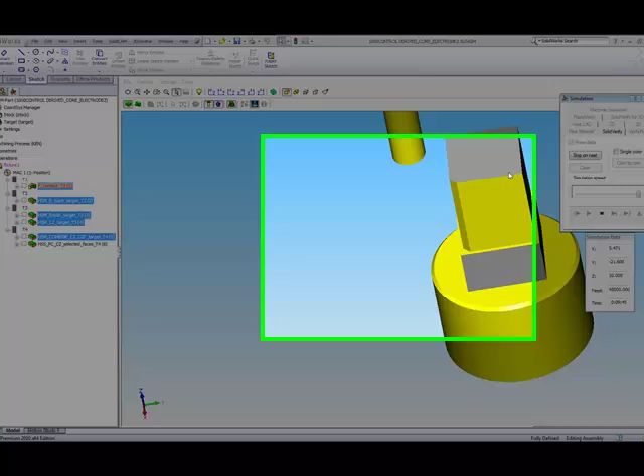We've improved our high-speed surface machining to be able to do those sharp corners by giving it an extra option of putting in a negative offset. Let's first take a look at our simulation up until the high-speed surface machining operation. You'll see that we first started with a regular profile operation and then continued with an HSM roughing operation to take out most of the material, as we can see in the simulation itself. Then we've done a rest roughing to get out the middle material as shown over here.

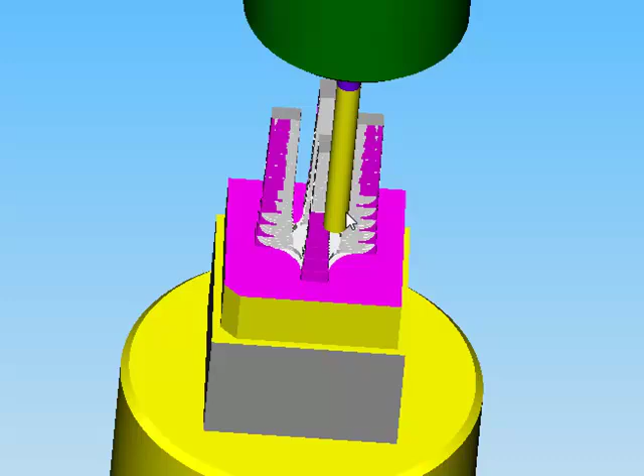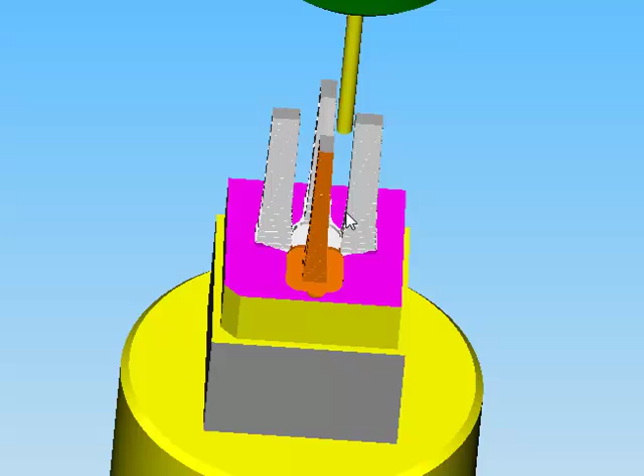Now we're going to our semi-finish of the HSM to get down to the very bottom as far as we can with this end mill. And then in the next operation, we'll be going down one more step in order to do another semi-finish up until it's zero offset, including the walls and the floors as well, as it goes around each one of those stubs to get to the very bottom, and then it'll clean the floor.

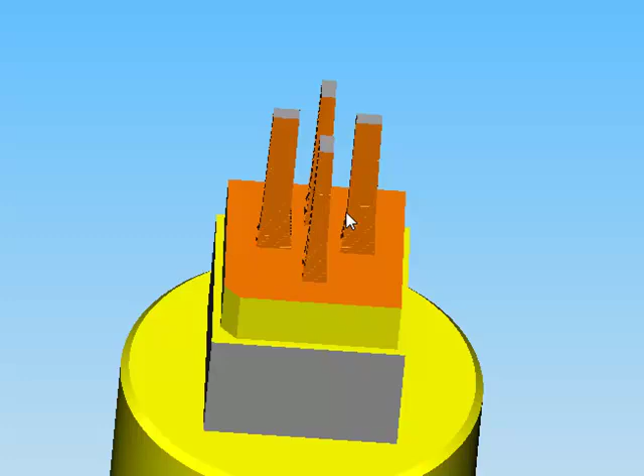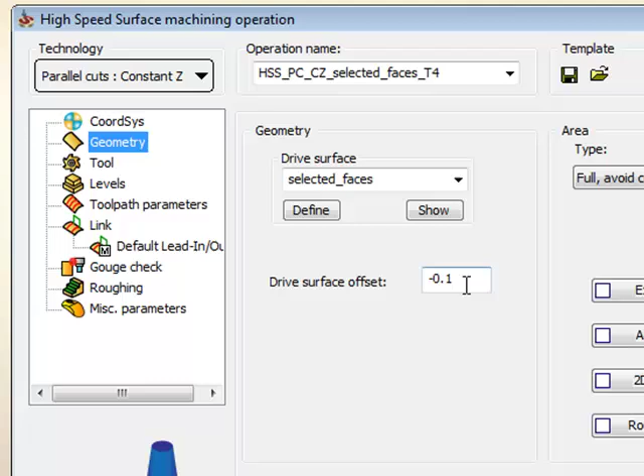As it finishes the last stub, you can see now that it finishes the floor, and now we're ready to run our high-speed surface machining operation to get to the negative offset that we need on this part. Now let's take a look at our high-speed surface machining operation. If we go into the operation itself, you'll note that when we go into our geometry field, we've added now the option of drive surface offset to be able to give an offset of a negative value using a sharp tool in this particular case.

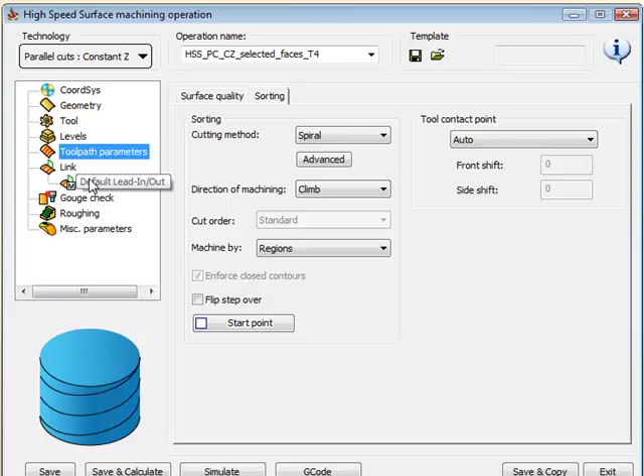In addition, if we go into our toolpath parameters, you'll see that we've also added in our sorting the option of going in a spiral motion around the part itself. This is necessary to give a nice smooth surface finish on the part. In addition to this, we've also added in our link the option of doing a lead in and a lead out using an arc. The approach and lead out of an arc is a necessity in order to leave the part with no marks on it.

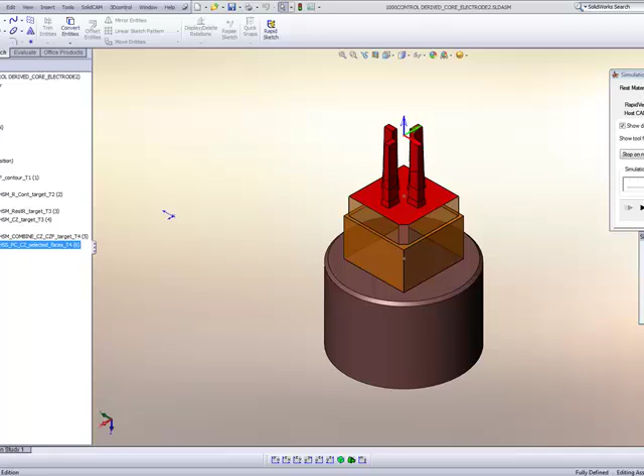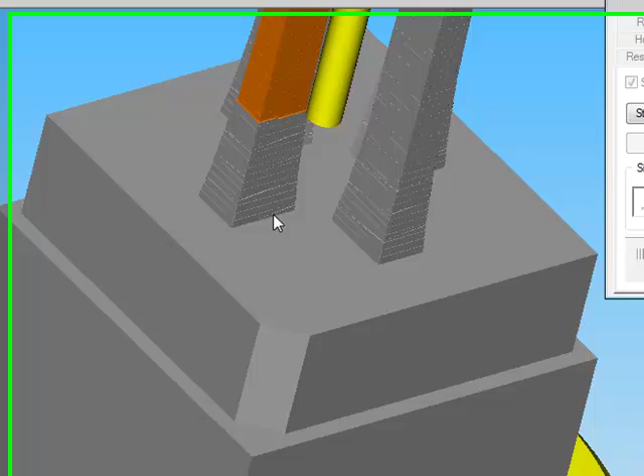If we take a look now at our simulation of this particular operation of the high-speed surface machining, you see that the tool will now be working on the negative offset. Since we have already finished this part to the zero offset, it's now working on a negative offset, still taking off the material, and it'll give us now a sharp corner at the very bottom of the part. And as you can see now, it's getting to the very bottom of the part, giving a sharp finish on the corners itself. And this was done for every one of those studs as shown over here.